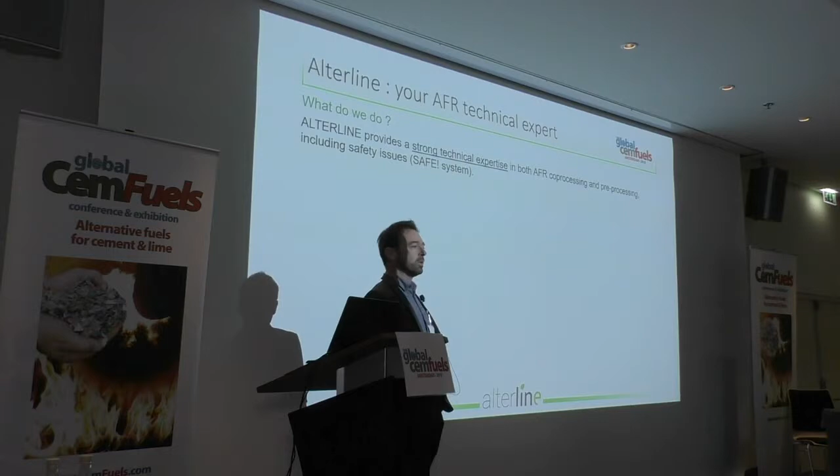Quickly, what do we do, or what do I do, because Alterline is very small. It's providing strong technical expertise for both co-processing and pre-processing. I say technical because I don't do waste sourcing, for instance, but we have partners who can propose it.

There are other people in the room, including also safety issues. We developed a specific auditing and risk assessment system for alternative fuel and waste on demand, together with a cement producer, which is actually Eqiom, a member of the CRH group.

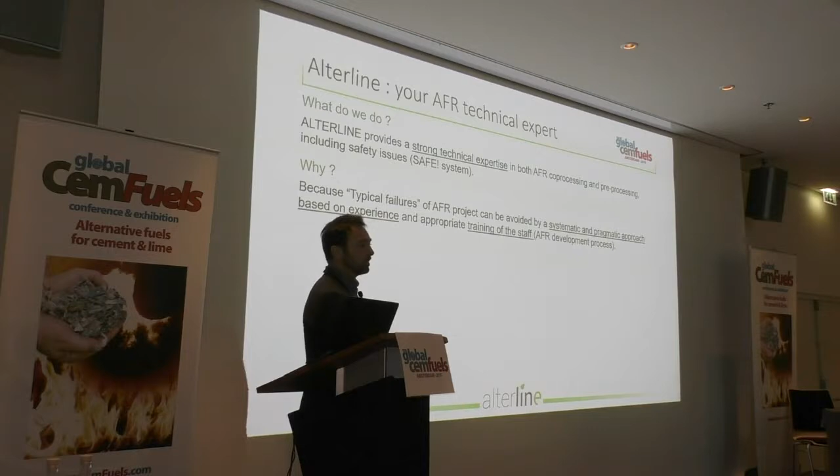Why provide strong technical expertise? Because not all the plants or producers have a large experience. Some groups have their own department with enough knowledge, okay, Geocycle, Axel is there, with Michael Inkel, but not all companies are so big.

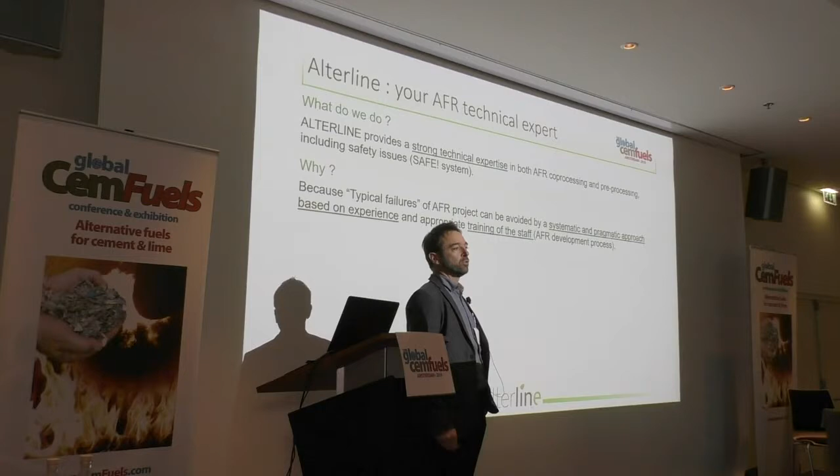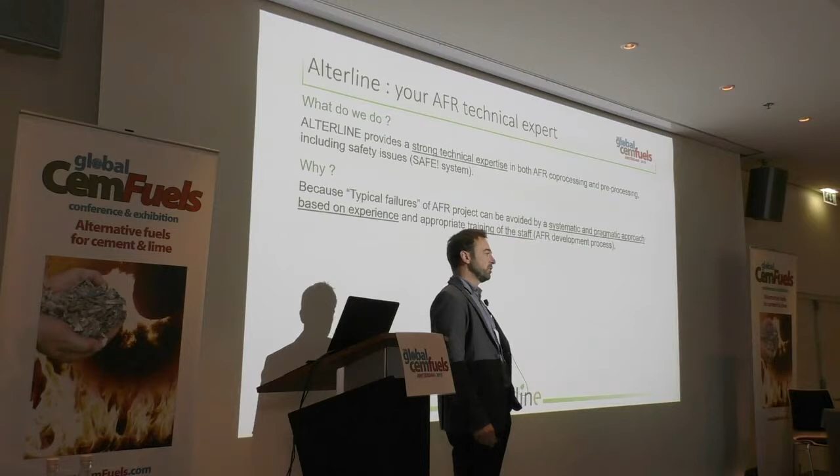Not all companies have enough plants to share the experience. The experience is the base to avoid project failures. There is a lot of success, but there are also a lot of failures in the AFR projects.

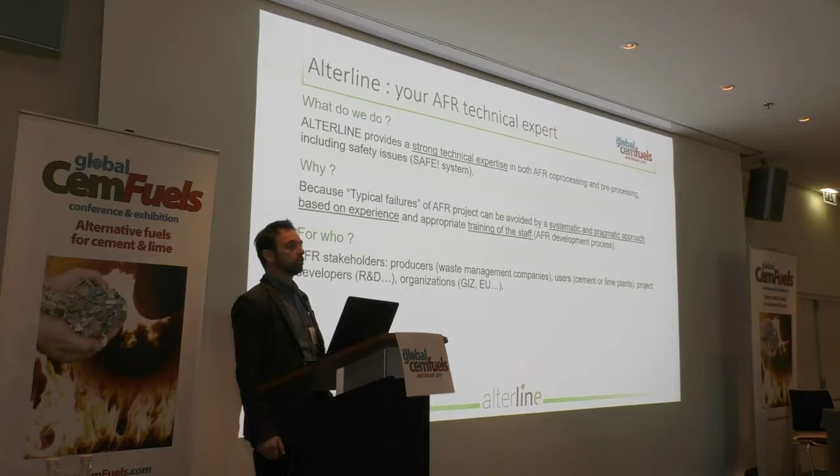For who? I said all AFR stakeholders, basically cement producers producing or not their own fuel, fuel producers, so some new trend. I have a client who is now producing fuel, but sells it together with technical services and support for investment, for the feeding lines for instance, and also associations like GIZ or the European Community.

All we do - so I said Alterline is small, so basically I'm no employee, but I work together with partners for the different contracts depending on the contracts.

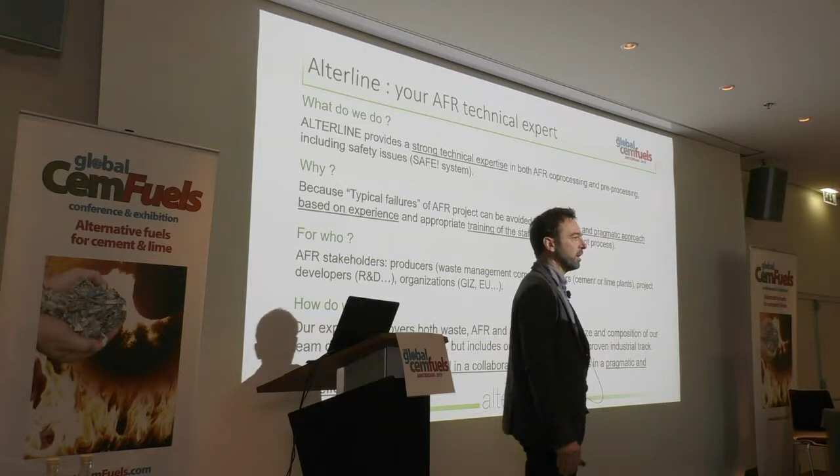Both are experts with a long and proven track record in the industry, so there are no born consultants in the team. I work in Algeria currently with François Vallet, who was a plant manager and Geocycle manager and technical manager in Holcim. For another contract, I worked with a specialist of maintenance, also previously head of maintenance, so a lot of ex-colleagues, but we are both experienced in the industry.

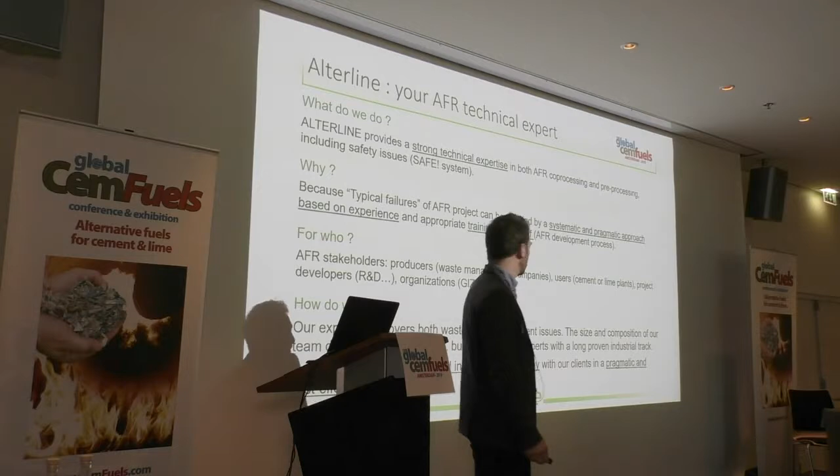So, alternative fuel can have positive and negative impacts, of course. If there was no positive impact, nobody would use it. I will focus on the kiln process impacts, which also have impacts on environment, clinker quality, and equipment. Both are together.

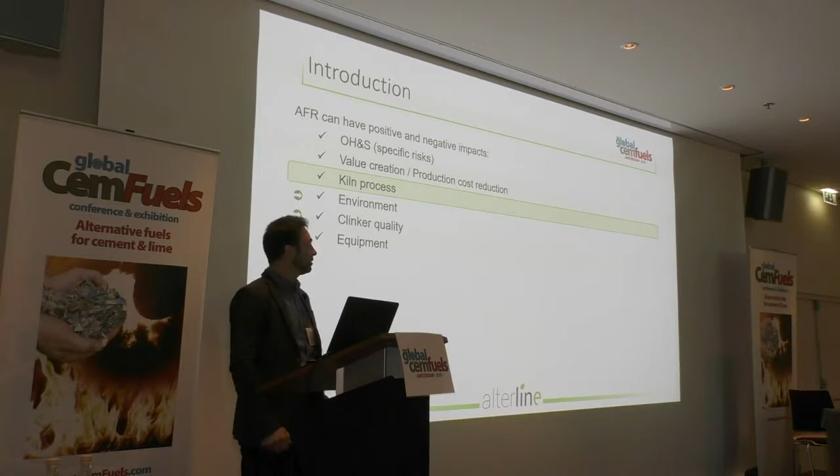You have to maximize the positive impacts, increasing the gross added value - I will speak about it a bit. The net added value of the alternative fuel can be the gate fee, can be the substitution, and then a combination of other factors, but you have to mitigate the negative impacts.

The limiting factor for using alternative fuel depends on each plant specifically. Of course, it depends a lot on the type of kiln. If you have an old wet kiln, it will be a completely different impact than if you have a calciner, a modern calciner kiln.

And I will repeat it a few times during the presentation: one of the rules is not starting alternative fuel if the kiln is not under control and if the basics are not acquired. So it's something to prepare.

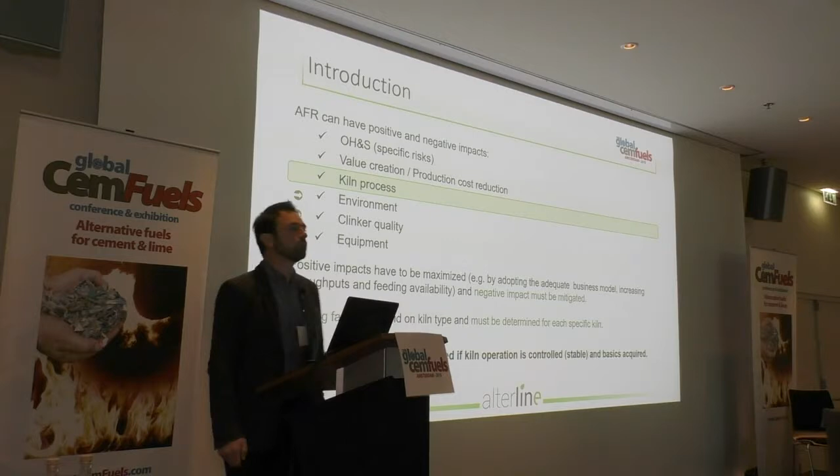Basically, the challenge is the more difficult fuels compared to traditional fuel. I speak here about, let's say, traditional alternative fuel, not about very high calorific spent solvents or waste oil, of course.

The impact on the kiln process will be an increased heat consumption, higher exhaust gas volume - which is also partially a consequence of the increased heat consumption - a higher input of chlorine, typically, and a change in the kiln operation and behavior.

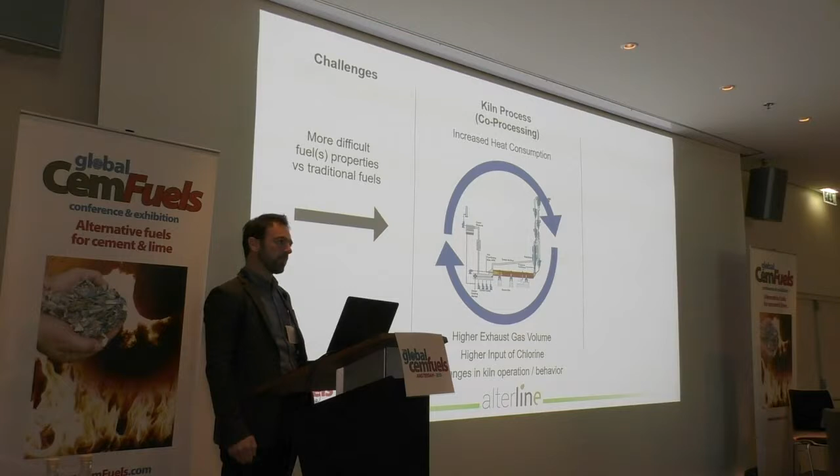And there are potential consequences. It can reduce the capacity of the kiln, it can reduce the availability of the kiln, it can reduce the quality of the clinker, it could generate higher emissions, and of course the target is to mitigate this negative effect, or even to compensate it.

That's the point - what are the factors impacting the kiln, if you compare basically alternative fuel to traditional fuel. Traditional fuel, I think, coal or petcoke, typically.

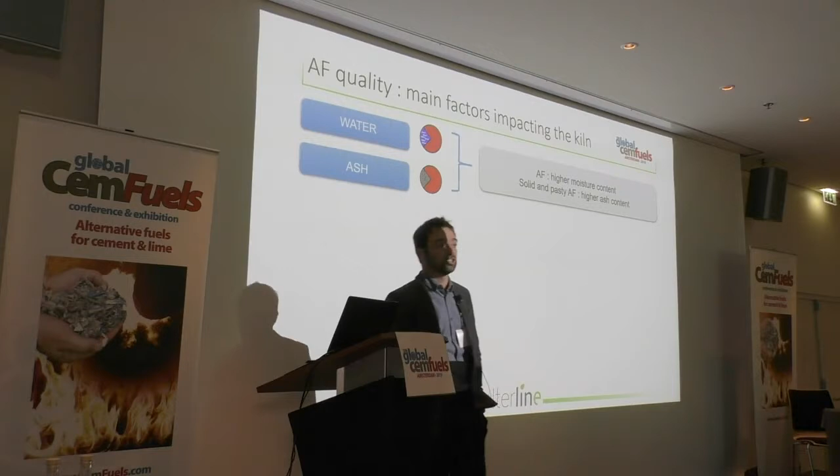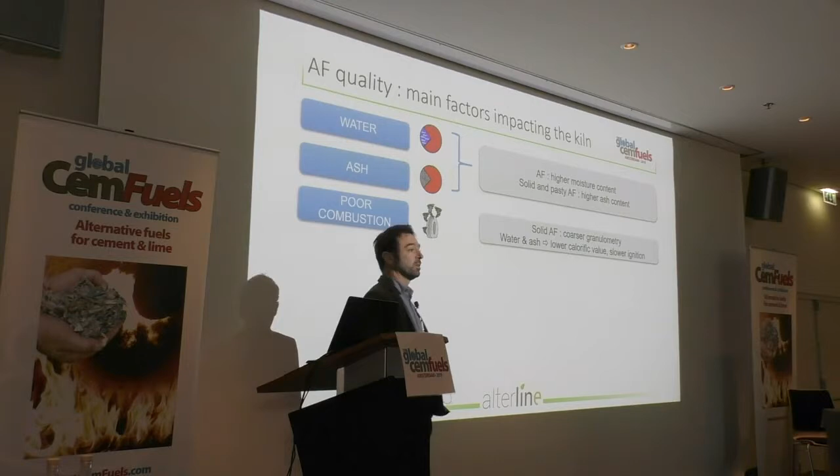First, the water and the ash are generally higher in the alternative fuel than in the traditional fuel. Secondly, the poor combustion, which is partially caused by the lower calorific value, the higher water content, and the delayed ignition often, and by the particle size.

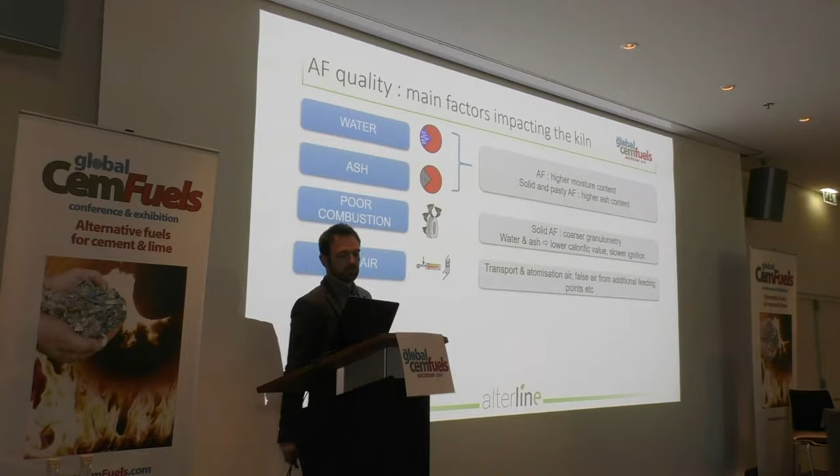The cold air, you will have some more pneumatic transport, or if you have no pneumatic transport and a mechanical feeding, you will have some extra false air. It will bring cold air into the system.

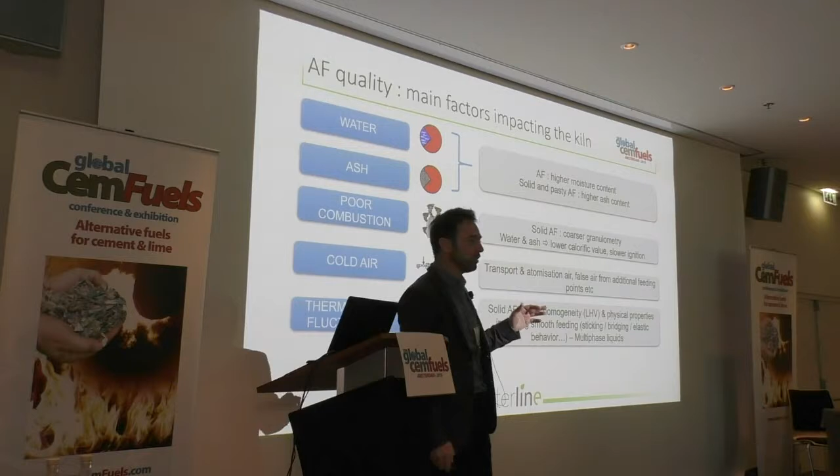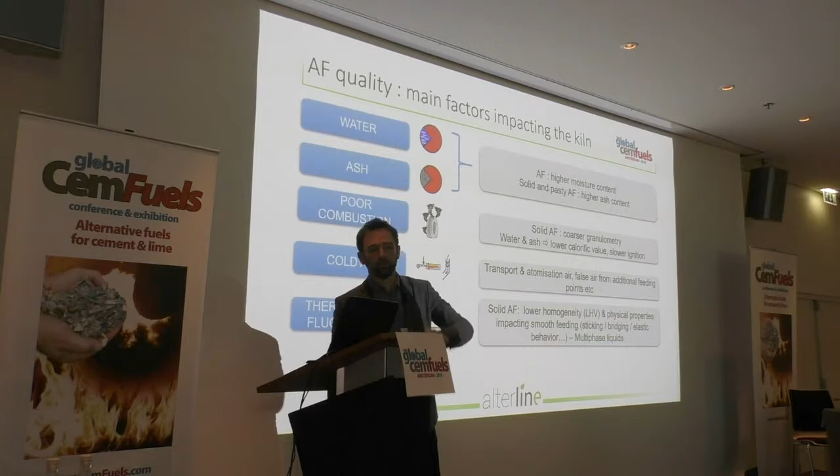The thermal input fluctuations, it's difficult to feed very smoothly alternative fuel. We will see it's really of major importance. You will have fluctuation in both calorific value, but probably also in the throughput. It's not only small fluctuation, it also includes the stop of the feeding because of bridging, because of clogging of the pipe, because we will come back on it.

And then the circulating elements, so mainly the chlorine, since if you use petcoke, and especially high sulfur petcoke, probably you will increase the sulfur input of the kiln.

The classification quickly of the alternative fuel, you can classify it by physical properties, let's say liquid, sludge, solid, or you can classify it by feeding points.

Liquids, let's say, if there are no particles in the liquid, it's not a big deal to inject it. It can be done at the main burner or at the calciner, depends on the liquid. Lump fuel is fuel which is too big, too heavy to be suspended in the calciner. Of course, you cannot move it pneumatically, so it will be put at the kiln inlet in a limited way, limited substitution to avoid reducing conditions.

It's like whole tires, filter cakes. You will see it during the visit on Friday for the one doing the visit in Lixhe. They have some filter cakes at the kiln inlet. If I'm not wrong, they move it from the calciner to the kiln inlet.

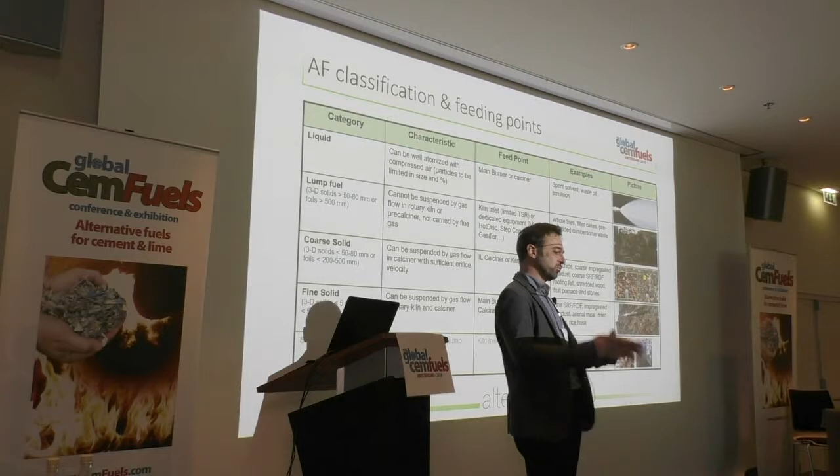Coarse solid, I mean solid with three-dimensional particles, 50 millimeters up to 80 millimeters, depending on the orifice speed, the calciner design, and 2D material, 200 millimeter sheet, can be higher depending on the handling equipment. That's for calciner. It's coarse solids, typically tire chips, coarse SRF, this type of product, shredded wood, really depends on the calciner design, I mean inline calciner.

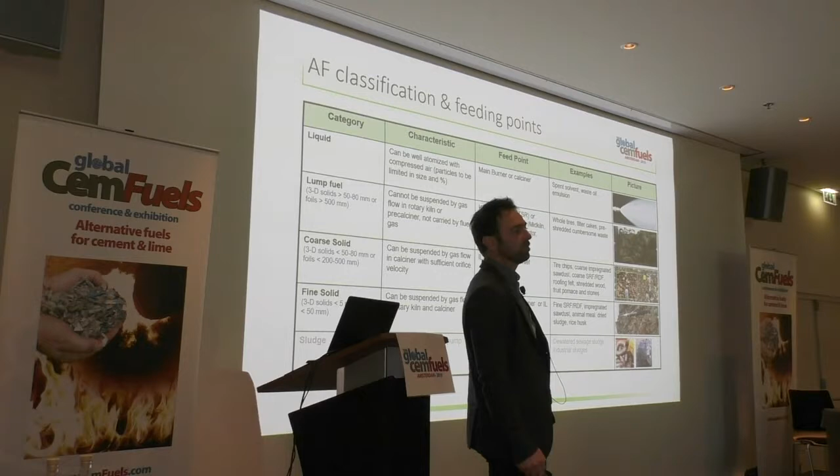And then fine solids for separate line calciner or pneumatic, so main burner, pneumatic injection. That's basically below 5 millimeters for the 3D particles, and 2D particles can be 20, 30, 50 millimeters. I have sometimes a quite different opinion than some SRF suppliers I heard earlier. To my opinion, the really good fuel for the main burner is mainly to have light material and avoid 3D or heavy particles, much more than the size of the 2D particles, which finally has low impact.

It doesn't make really a difference if you have sheets of 20 millimeters or 30 millimeters or 35. So the first impact will be on the thermal consumption, mainly due to the water and the input of fresh air in the hot zone, and the increase of oxygen, because since you have some fluctuations, you need to increase the oxygen at the kiln inlet. It means you will have more gas and you will increase the consumption. The two big factors in these three are water and increased oxygenation.

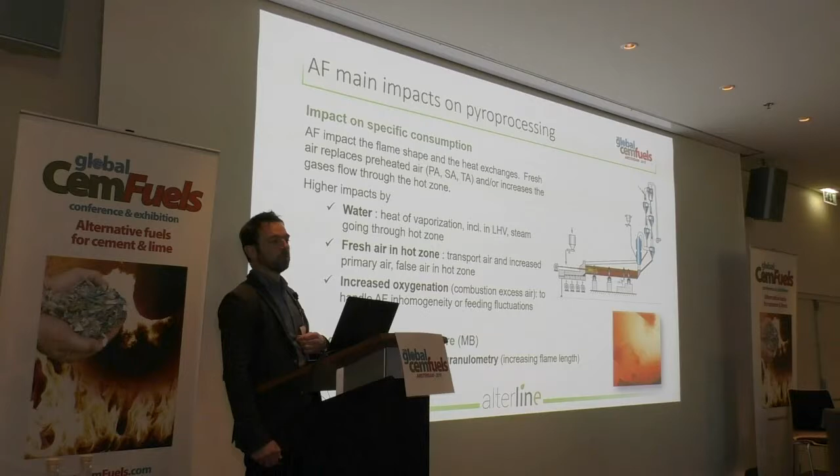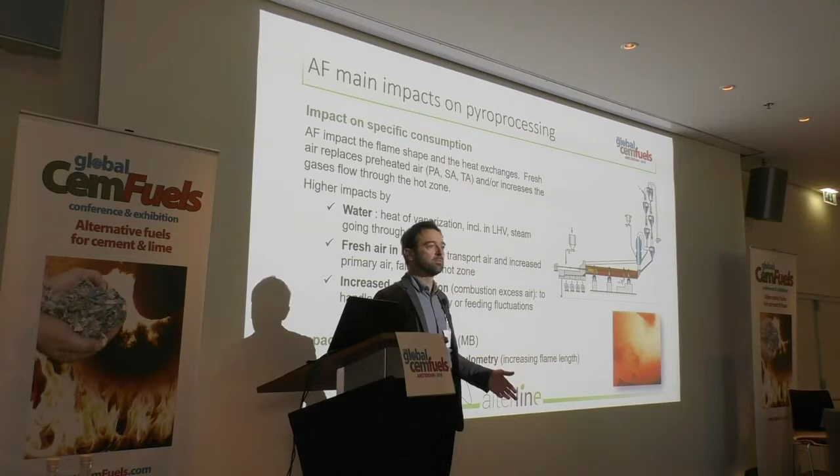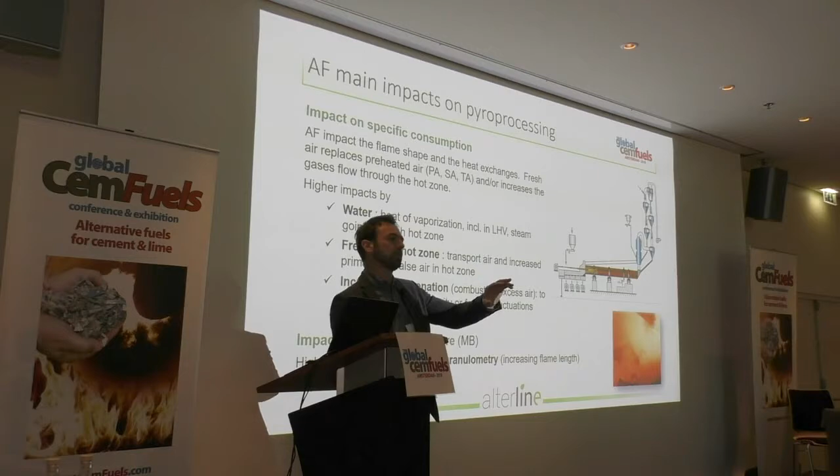The impact on the flame temperature, it's of course depends on the kiln. If you have a short kiln with 40% thermal input at the main burner, the impact will be much faster than if you have a long wet kiln with a huge consumption and only the main burner. The problem is typically linked to the water content and to the particle size, because if you have big particles, you will increase the flame length to avoid the particles falling in the bed, and then you can have too low flame temperature.

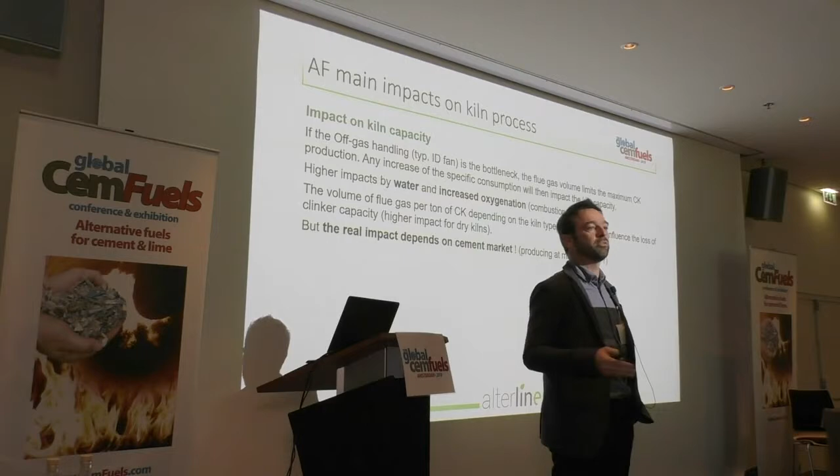Among other problems, the kiln capacity, the impact on the kiln capacity. If the treatment of the off gas is the bottleneck, basically the ID fan capacity, if the ID fan is the bottleneck, so you increase the heat consumption, so you increase the flue gas flow, basically also the water you inject and so on, oxygenation, so you will decrease the maximum capacity of the kiln. If it's not a sold out market, let's say in Europe in 2015, for instance, it was no problem at all, because the kilns were not operating at the maximum, they were not at the BDP.

So that's not a problem. But if you are in a sold out market and you sell everything you can produce, then you have really to take into account the loss of production capacity and to mitigate it or to compensate it.

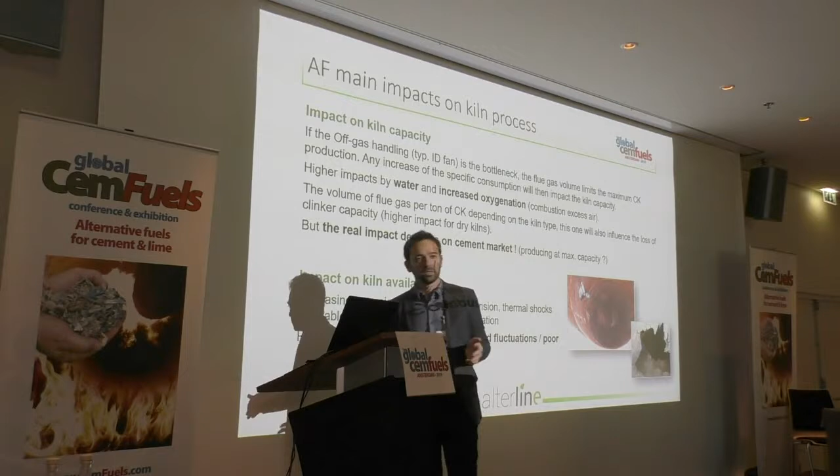The impact on the kiln availability, basically maintenance, like corrosion problems, refractory expansions, and on the other hand, due to the chlorine increase, more buildups, less stable coating, so risk of falling. Globally, you need to increase the maintenance.

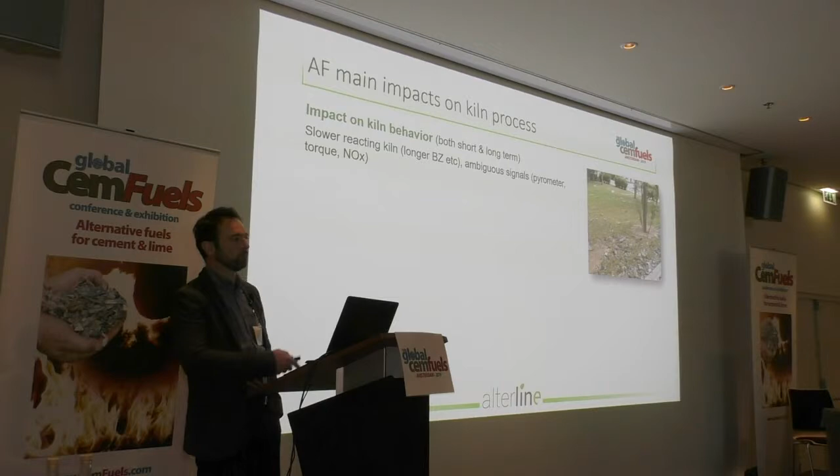The impact on the kiln behavior is mainly due to the change in the flame. If you increase the flame length by working at the main burner, you will also have a slower reacting kiln, with impact on the measurements. You have to know it.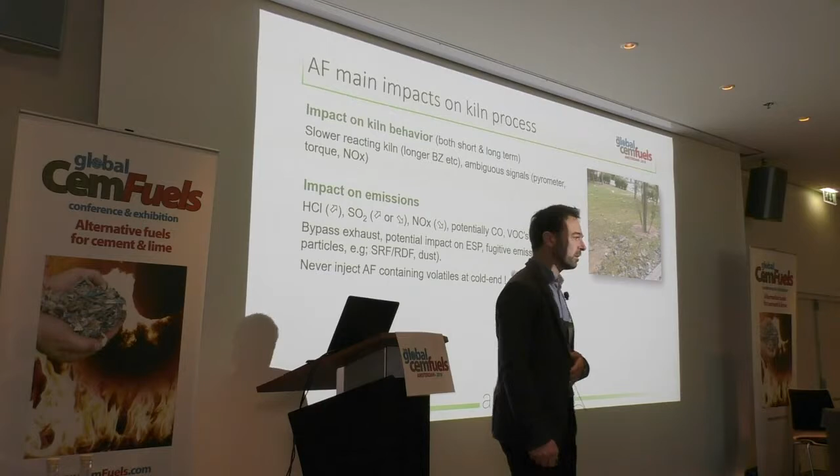The impact on emissions: typically you can increase or decrease SO2 emission, because if you have big fluctuation, you will have reducing conditions from time to time and SO2 peaks. But you can perhaps also improve it by switching from petcoke to alternative fuel. You will typically reduce the NOx. And be careful, one important point: never put material containing volatiles at the kiln inlet, cold side, because you will just find them at the stack.

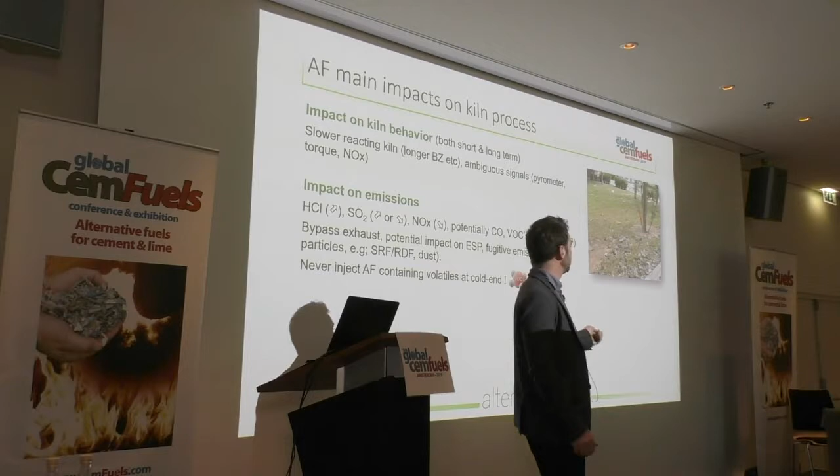Something also about emission: generally we don't speak about the fugitive emissions. With the development of SRF, I think it's of major importance. I don't know how many plants I've seen with a lot of plastics everywhere. If you install a feeding line, especially if it's windy, think about the fact that a standard belt, however you cover it, will never be tight. It means you will always find some plastics everywhere. Yeah, something is wrong.

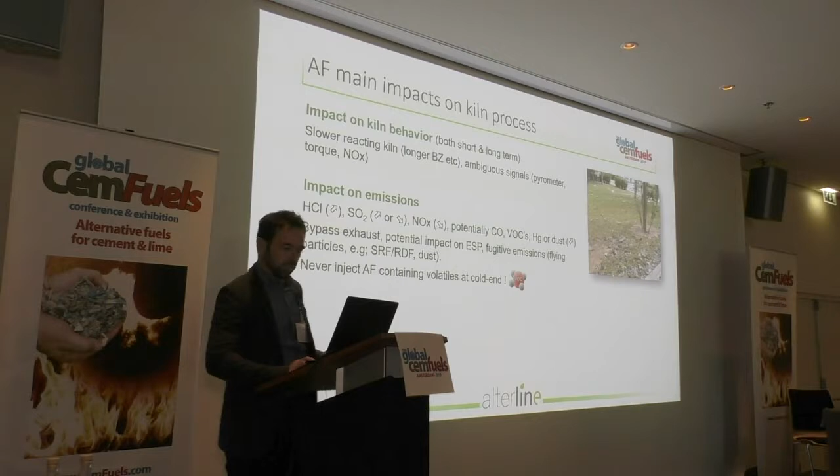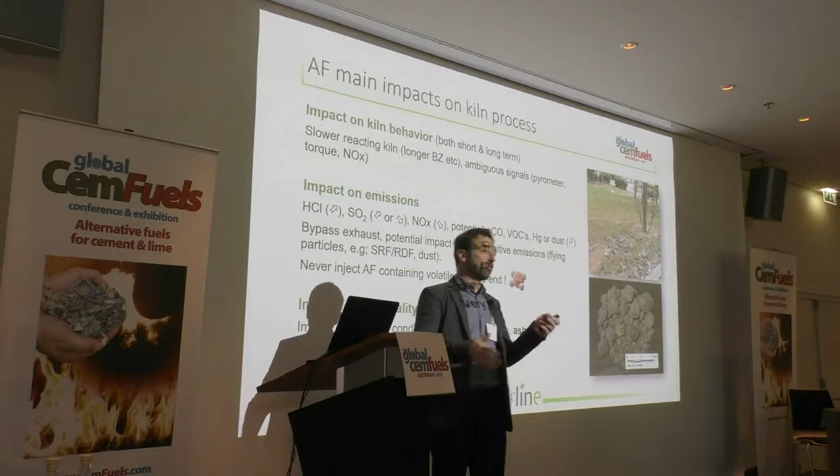Okay, impact on quality can be reduced clinker. At a certain level of alternative fuel, the ash volume and the ash composition start to be very important, especially with dried sludge, for instance, ashy fuels. And you need to compensate for it by preparing the raw meal correctly. So it's important to keep in mind.

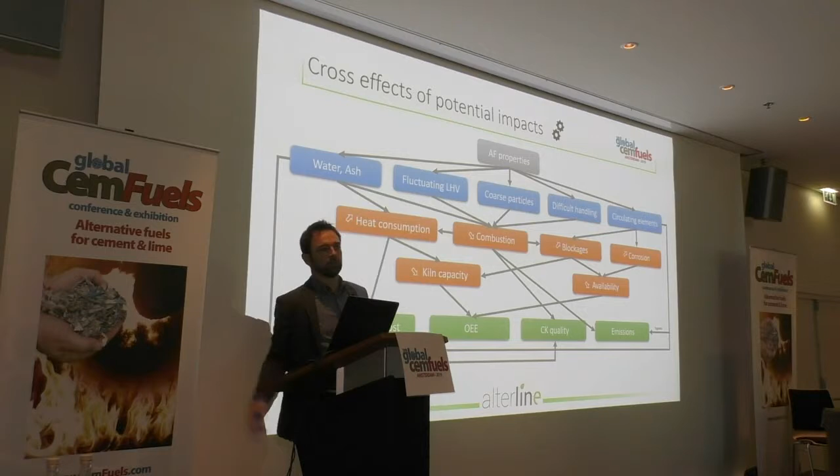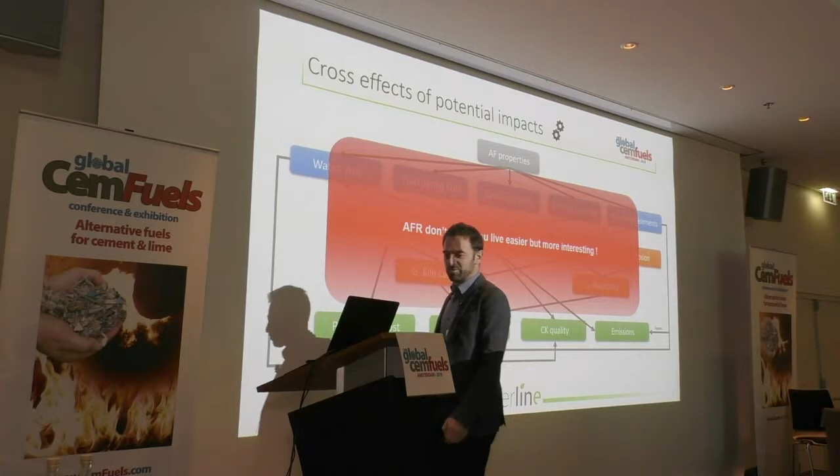All these impacts have cross effects, as I said: thermal consumption, then kiln capacity, then if you have higher velocity in the tower you have more buildup, and the buildup is also increased by the chlorine and so on. So it's quite complex. It doesn't make your life easier, but more interesting. It's not from me, it's from Michael Winkel, who made a nice presentation previously and was a colleague, but I think it's completely true.

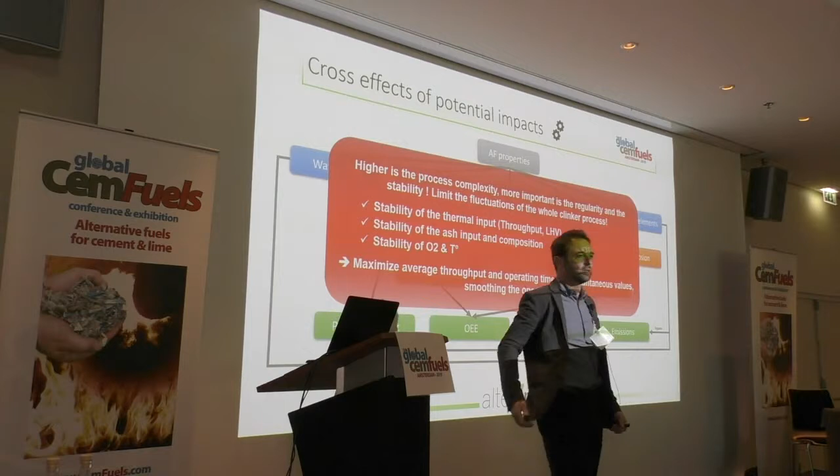So basically, because I'm always too long: the higher the complexity of the process, the more you need stability. It's true for cement, it's true for alternative fuel, and I think it's true for any industrial process. And stability, in terms of alternative fuel, means stability of the thermal input, both stability in the calorific values and stability of the throughput. It means stability in the ash input and composition, above a certain level of course. If you are putting something like 0.05% ash on the clinker, you don't take it into consideration. And stability in both oxygen profile and temperature in the kiln.

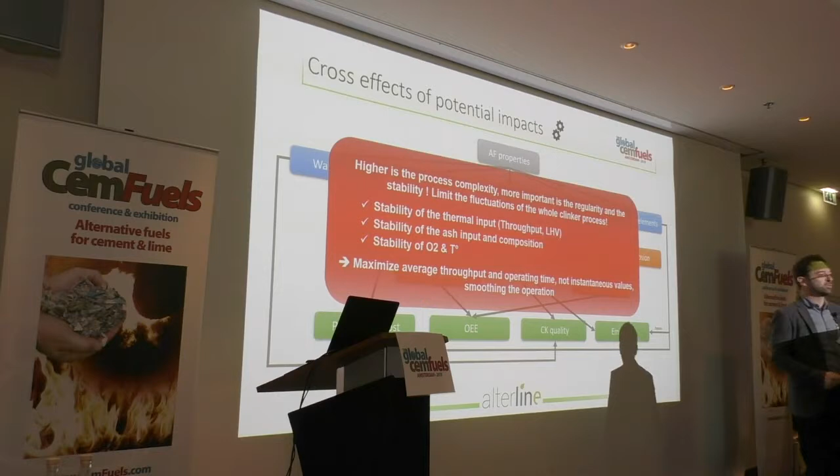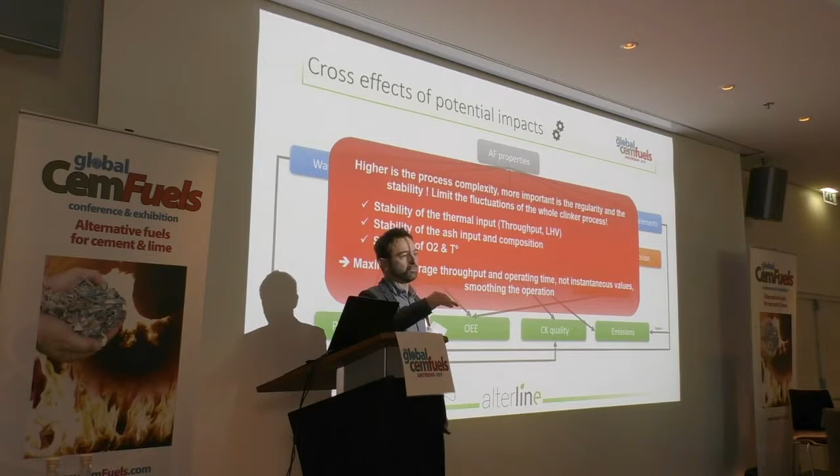So it's always fighting against a trend in the operators, which is really challenging the throughput and going to a higher value during 5 minutes or during 1 hour. That's not the idea. The idea is to keep the installation available and to maximize the average throughput without too much fluctuation.

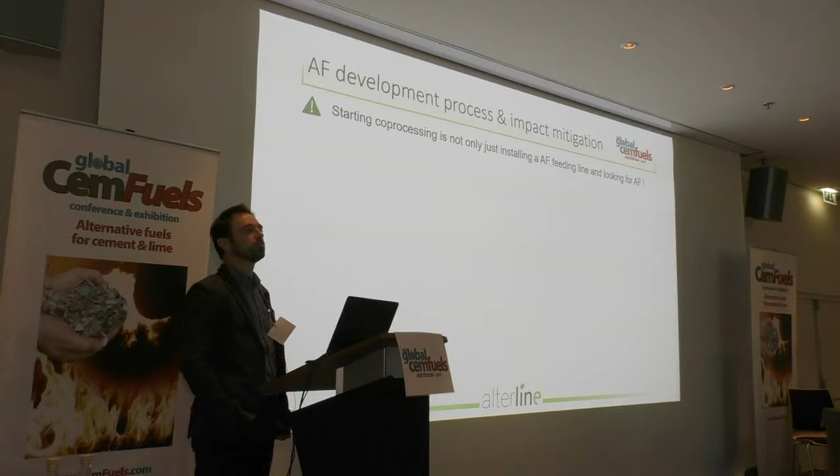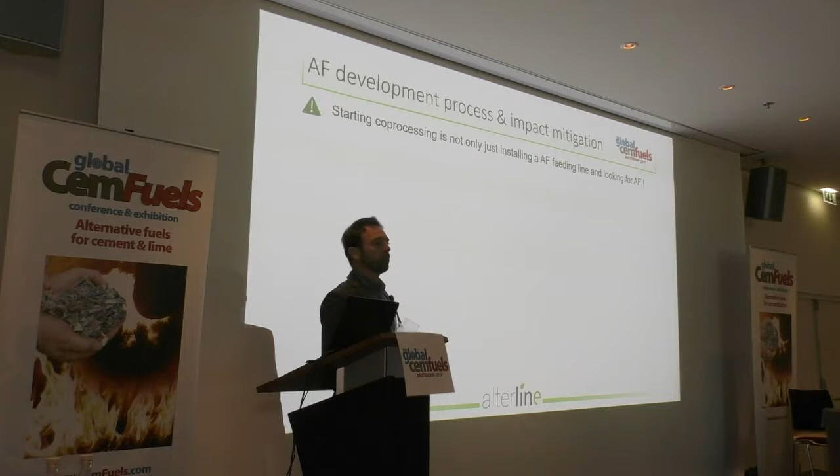Again, starting alternative fuel co-processing is not just adding a feeding line. If you start like this, you have a quite high chance of failure. It's really an alternative fuel development process. It includes the feeding lines, but it's not only the feeding lines. And ideally you should start the development before buying the feeding line. You will save reputation, you will save time, and you will save money, that's for sure.

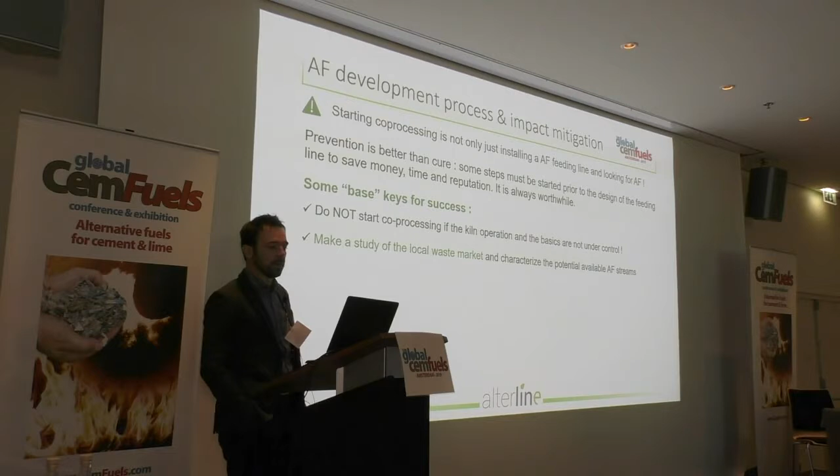Some keys for success: I told it already, you start only with a kiln which is under control. That's not really my job, but it's really of major importance. You make a study about the available alternative fuel before starting to build a line. That's the second cause of project failure. You don't build the right line for the available alternative fuel, or even you don't find alternative fuel, or it's too expensive. So that's something very important to do.

Train the management and the people of the plant before starting the co-processing, that's also of first importance. Knowing that there could be impacts and what can be the impacts, knowing how to mitigate the impacts, how to analyze what they see. Training the people for sampling alternative fuel, it's more difficult than sampling cement, for preparing and analyzing alternative fuel, you know.

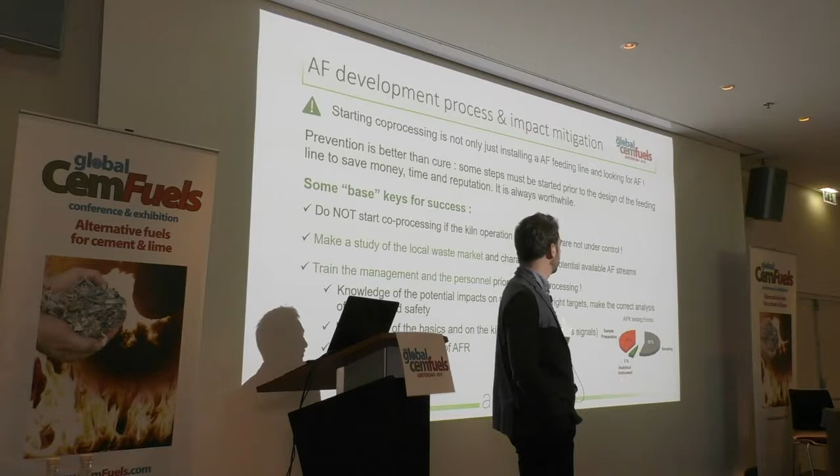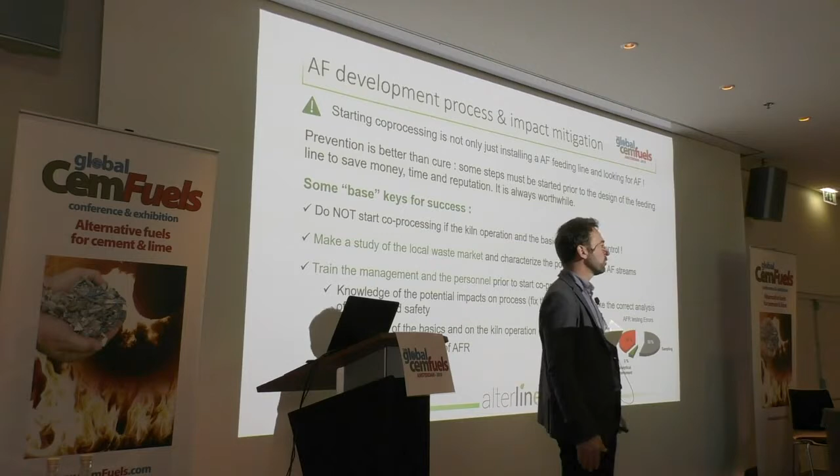Some studies were made in the Holcim group when I was in Holcim, and only 5% of the errors of analysis of alternative fuel were due to the analysis. It was mainly sampling, 55%, and preparation of the sample, 40%. There are a lot of plants with a very nice alternative fuel lab, and they have SRF but they have no lab shredder. So they cannot prepare anything correctly, and they cannot sample adequately the material to have something representative. So you really need a systematic and pragmatic approach.

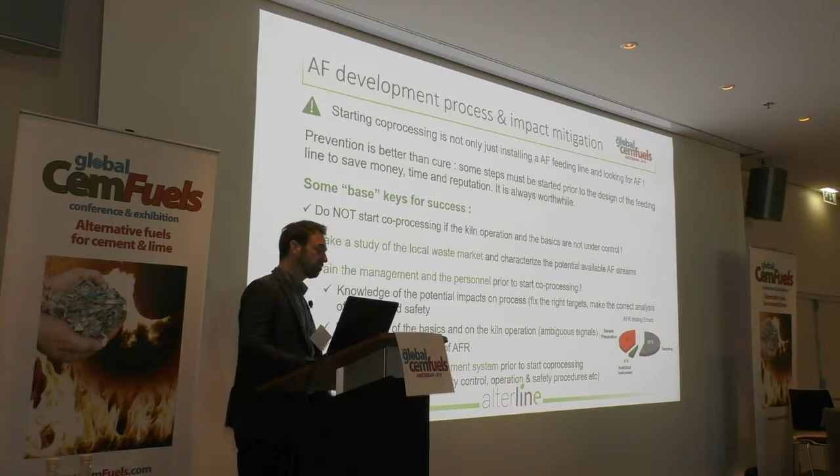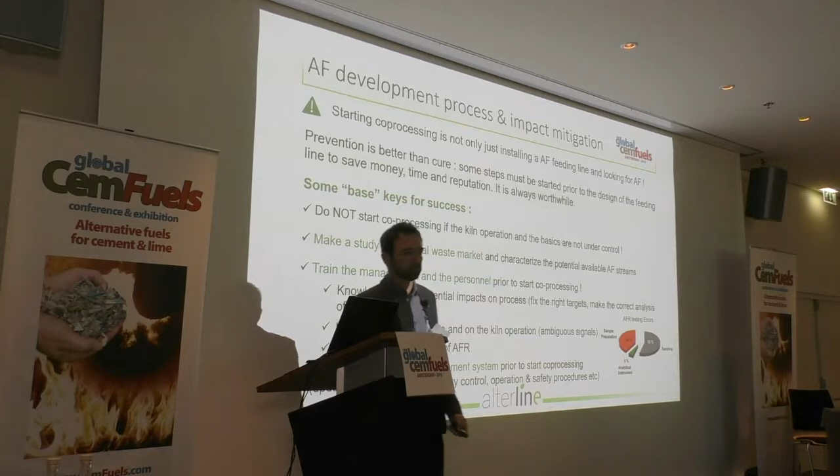Developing the adequate management system. Don't start co-processing if you haven't developed a reception and acceptance procedure for the alternative fuel, an analysis procedure, everything around it. You need quality control of the alternative fuel, but probably you also need to increase the quality control of the clinker. You need to measure the circulating elements in the hot meal more often. This type of step has to be done beforehand.

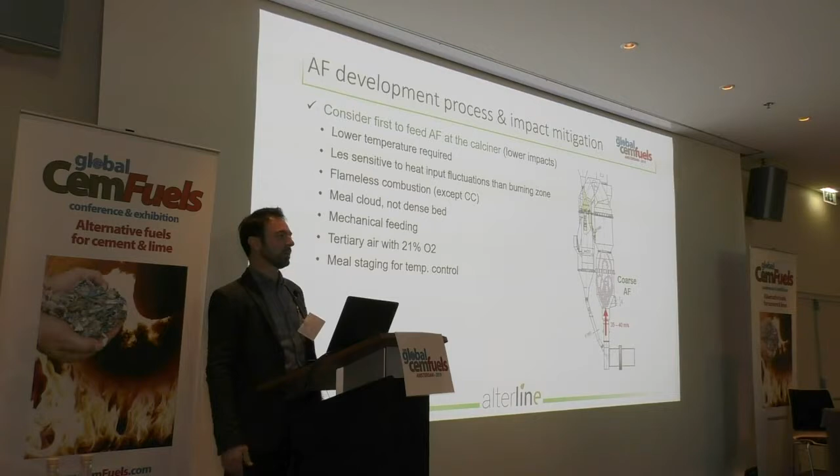Another key is switching to the inline calciner when you have one and when it's modern enough, because it's less sensitive to fluctuations. It's a flameless combustion if you don't have a separate combustion chamber. You can have mechanical feeding, so you can feed much coarser alternative fuel without paying the same cost. You have the tertiary air, which contains 21% oxygen by definition, so it's easier, but you need a good velocity at the orifice and enough residence time.

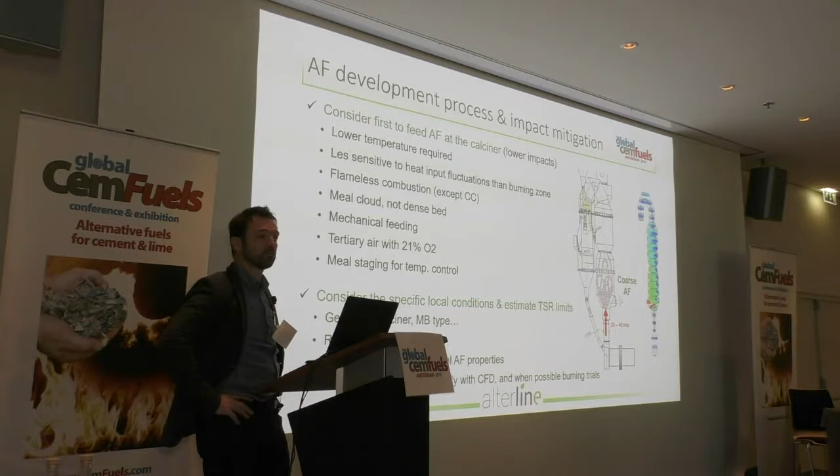Consider the specific local conditions. I said it at the beginning: each plant is different. The geometry of the calciner or the main burner type, the raw meal properties, can vary a lot from one plant to another. The characteristics of the traditional fuels is also perhaps something you will need to improve.

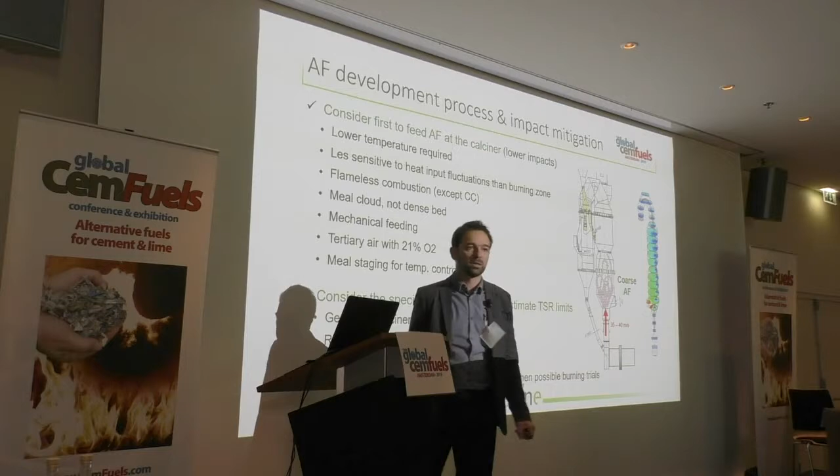The potential alternative fuel candidates and their properties. Often what you do is compare with an existing plant. Eventually you make a CFD - I think CINAR and XRG are here. And when possible, which is always my preferred solution, you make some trials. But then you already need a feeding line, of course.

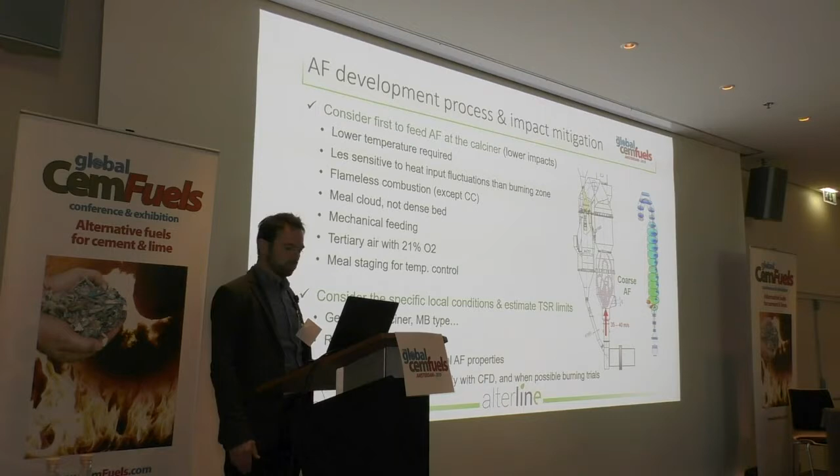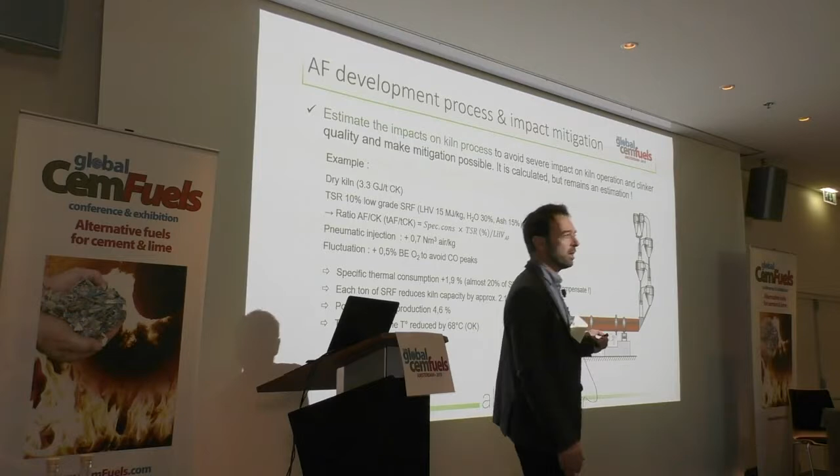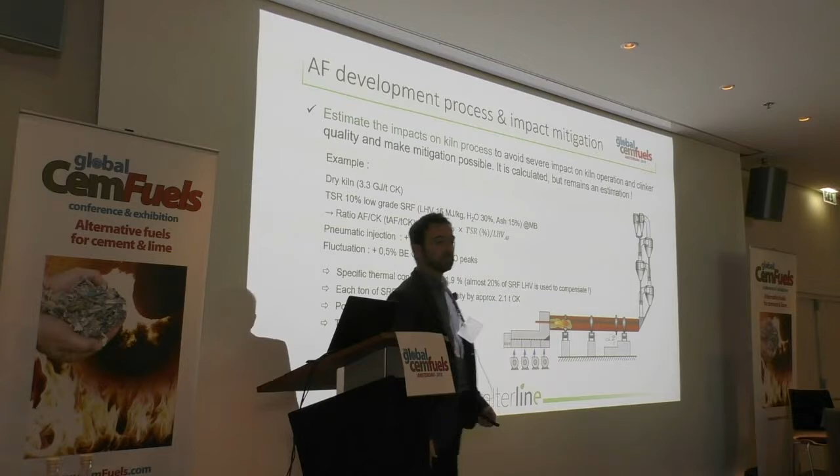Estimate the impacts on the kiln to know what could happen. It's just a short example, I won't stick too long on it, but it shows there could be major impact. If you put only 10% of low-grade fuel at the main burner on a preheater kiln - low-grade SRF, like 30% water, 15% ash, you'll tell me it's an ugly SRF, but it's not so ugly, there are much worse ones in Egypt for instance. If you don't make any mitigation, you will consume 20% of your SRF just to compensate the thermal consumption increase, and you could decrease your production by between 4 and 5%. It's huge if you are in a sold-out market. So you need to do something.

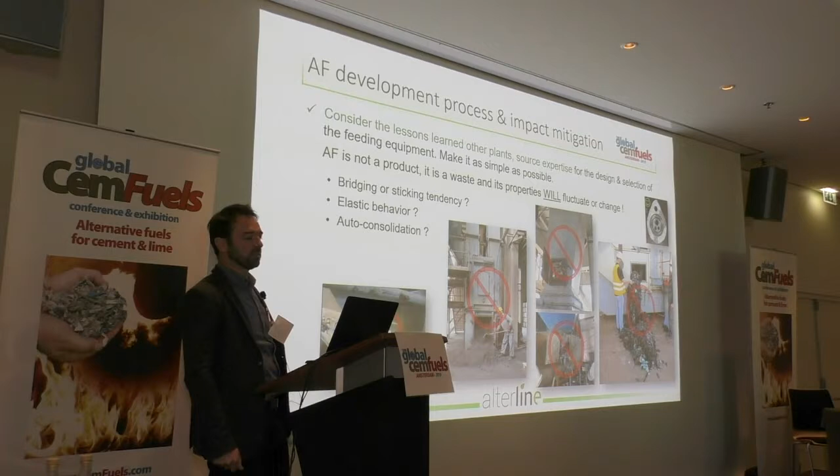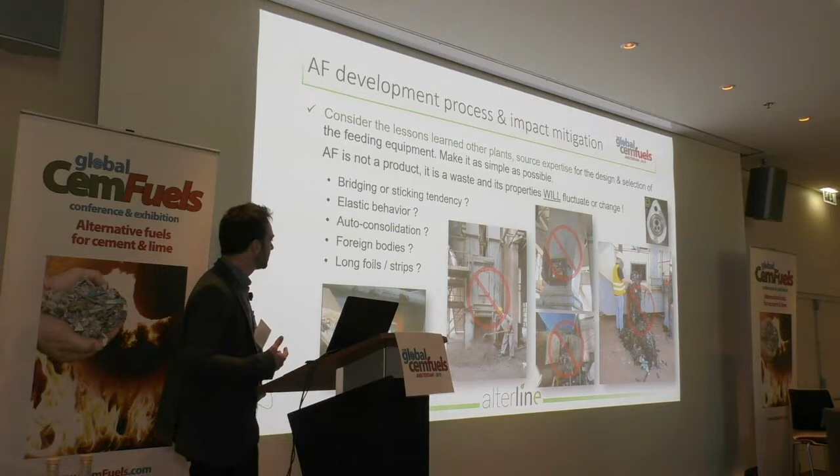So another key: you need to be based on experience and to share the experience with others. It's not only theoretical. With SRF, the first projects were mainly problematic everywhere, whatever the supplier, because it's bridging, it's sticking, it's elastic. You can have auto-consolidation - I'm sure Luigi Di Matteo will speak about it, he always speaks about it. You can have foreign bodies, you can have long strips. There are a lot of examples of clogging problems. Some of you will recognize that plant.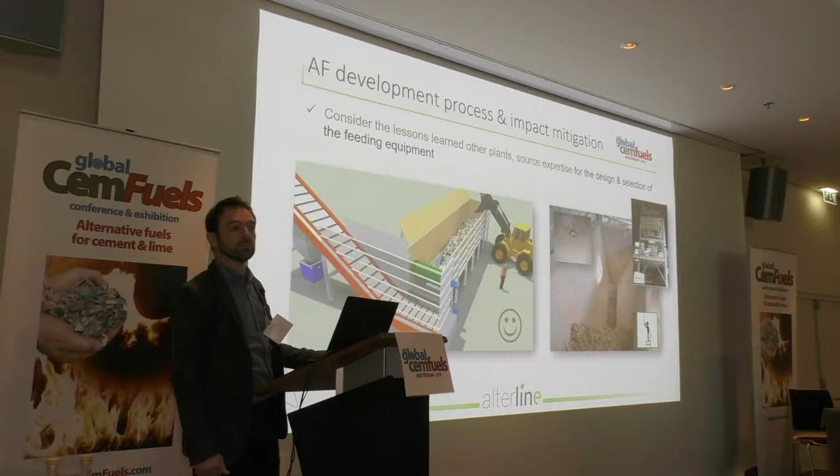Five minutes, it's short. So to address this, you make a good design - if you have that in your plant, it will never work. That's an example, that's something we dismounted. Improve the maintenance, of first importance also - predictive and preventive, because you have to avoid the fluctuation, meaning you have to avoid the blockage of the feeding lines, both pneumatic or mechanical.

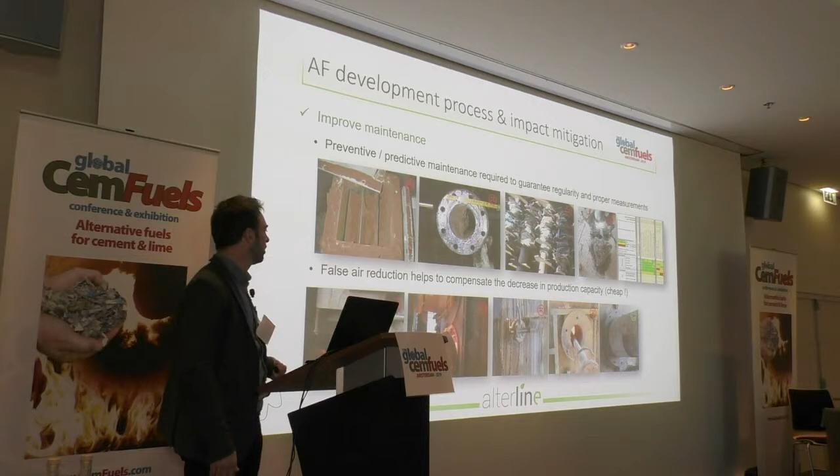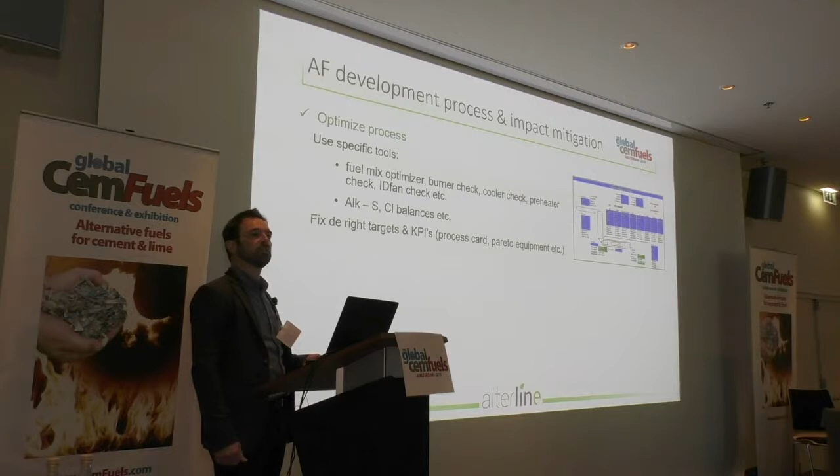Fight against false air - it's always important, and it can help you compensate the loss of production related to alternative fuel if you need it, and anyway it's good practice. So don't do this, go for a tight system. Optimize the process and use good AFR tools. If you don't have it, source it externally. Use process cards, make Pareto analysis, debottleneck the existing line step by step, and always question the most cost-effective solution.

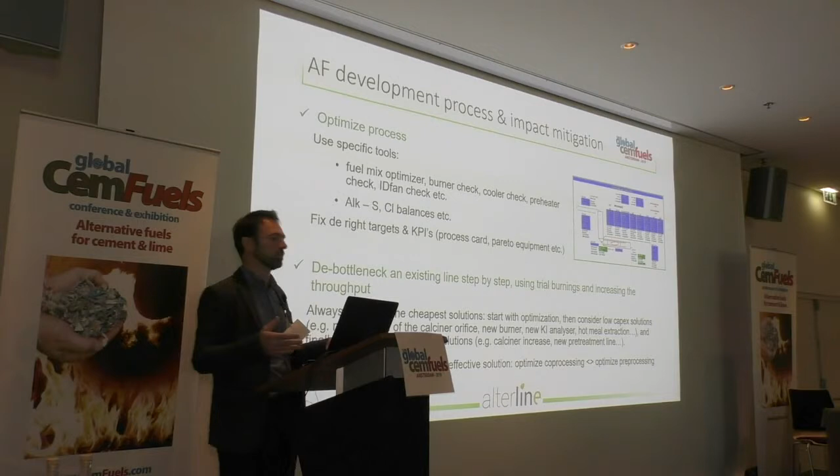Also with the preparation of the alternative fuel, you can either improve the kiln or improve the fuel. Both are always possible.

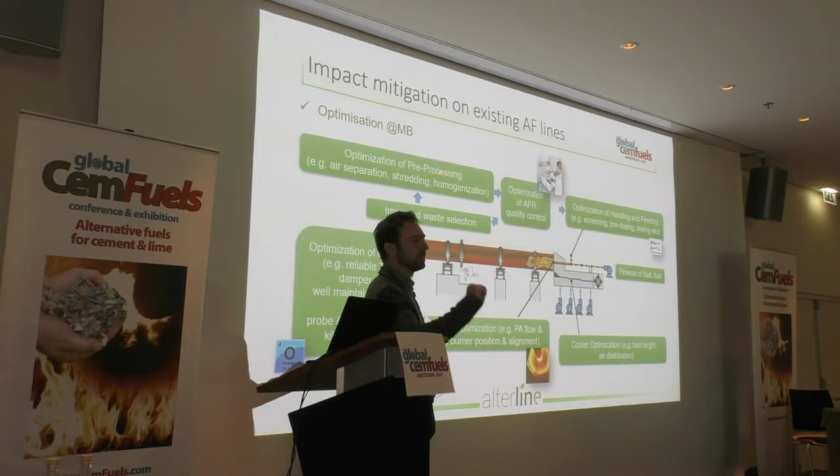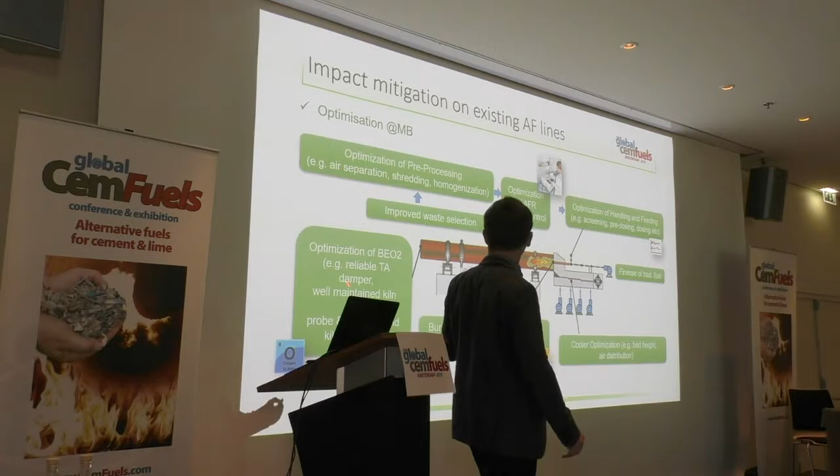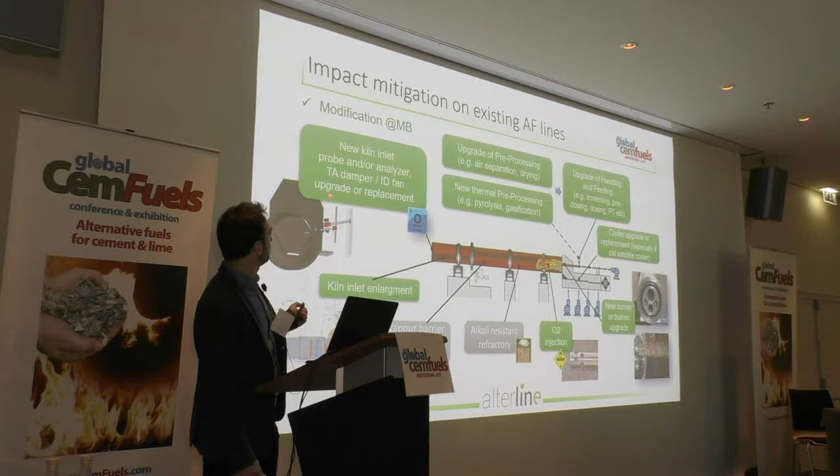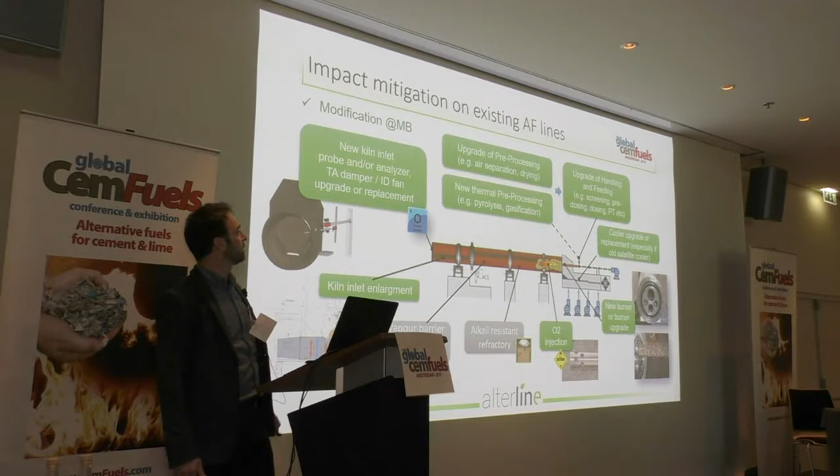So typical optimizations - low cost, let's say, low capex: improved waste selection, optimize the pre-processing, optimize the quality control, the handling and the feeding of the waste, the cooler. You need some tools for optimizing the cooler, the burner, everything. Optimize the backend, oxygen measurement, and so on. Instrumentation is always of first importance. If you want to modify, you can put a new kiln inlet analyzer, improve or put new pre-processing, a new burner, change the refractory, increase the kiln. That's for the kiln. For the tower and the calciner, basically you maintain everything.

You increase the quality control, you increase the hot meal analysis. You can change sometimes the feeding point, be sure the tertiary air damper is working properly, and so on.

As modification, you start generally with higher capex. You can upgrade the calciner, put specific equipment, upgrade the alternative fuel handling, replace the cyclone with a low pressure drop cyclone. There are other risks with it, but you can increase the preheater cleaning system, typically put an oxygen analyzer. It's always easier to envisage a bypass or hot meal extraction if you have no money for a bypass.

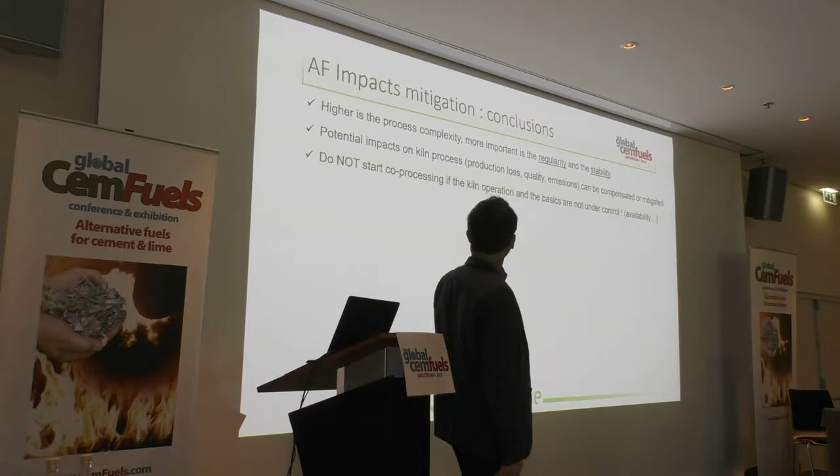So shortly, I said first regularity and stability. Secondly, all the potential impacts can be controlled if you do it correctly. Perhaps you will not go to 100% substitution, of course, but you have to estimate the impacts and control them. Do not start co-processing if the kiln is not stable. Develop the adequate management system, procedures, and train the people also. Start firing at the calciner.

Make the sourcing before starting your project, but I think everybody knows it - nobody does it, but everybody knows it. Simple is beautiful. Don't try to reinvent things, make rocket science. Less equipment, less trouble, let's say. Maximize the operating time, minimize the fluctuation, and start always with the low capex solution for the optimization.

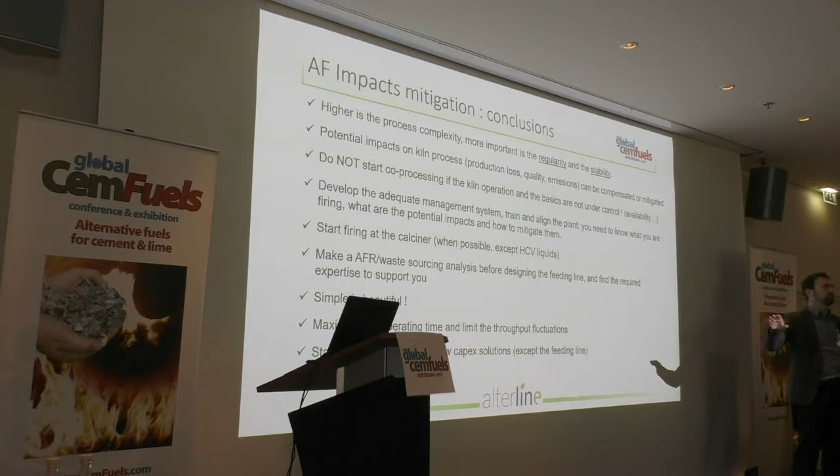For the feeding line, you need to pay the price. If you put shitty equipment, you will have only shitty clinker and shitty problems in the plants. I have a lot of clients trying to buy on some local market in Asia and so on, and for both pre-processing and co-processing, it doesn't work until now. Probably there are some good suppliers, but I don't know them. So pay the price to have a good feeding line, but make really a big alternative fuel development program, and not just feeding line. That's my message. And start step by step.

And the quality is good. To my opinion, I think it's good. Also, when I discussed with Xavier Dubert - he's not here this year, but he's a specialist in burners, he made a presentation last year - he told me that the last tendency currently was to add a satellite burner on the new burners. It's quite fluctuating. Previously it was not good, now it's good again. Honestly, I would say I would not buy a new burner without testing it, because of the cost.

You put the pipe, you put the concrete, and you see. What I would probably not test, it's something I've seen in Barcelona during a visit - I don't know if they're trying to make a kind of satellite burner inclined to have some ballistic flight of the material. But okay, I cannot answer better than this, sorry. But I know it's working in some plants, and I would start with it.